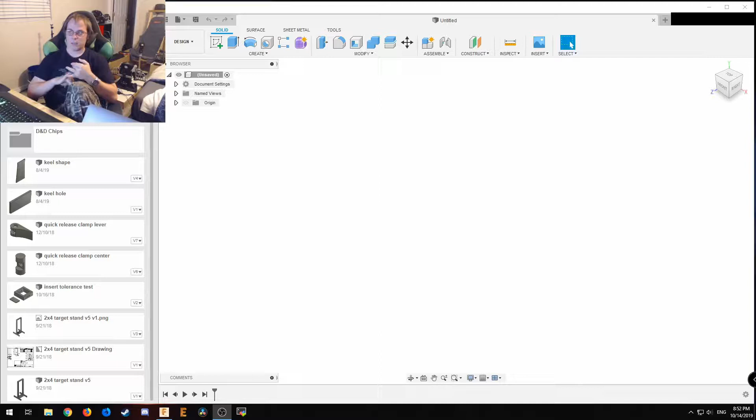It's design, some electronic work, a little bit of coding, and that's pretty much it. So we're going to break this down into a couple of chunks. First off is going to be design. This one's going to be a relatively physical portion. You're essentially trying to design the physical box itself. Now you can use something like an old drawer, you can literally make it out of anything that you want.

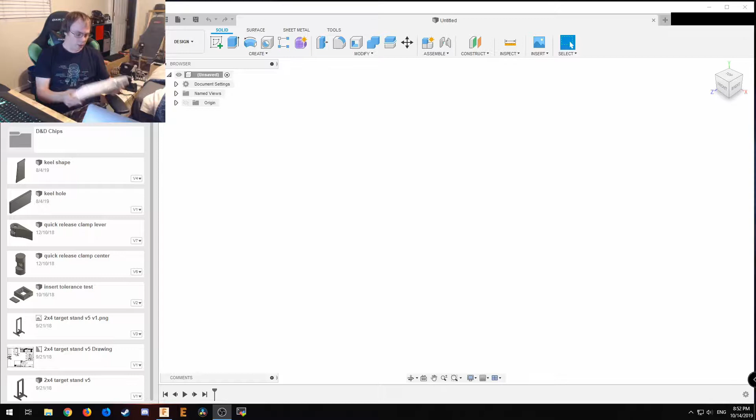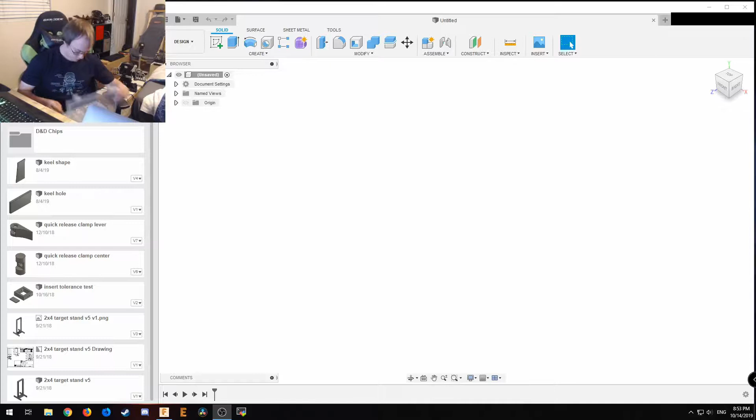And the thing that you need to know is the diameter of the neck. I'm also going to be using some potentiometers as well. So what I mean by the diameter of the neck is that you need to measure the part that's going to go through before you can screw it in. Not entirely sure you can see that, so I'll throw up a drawing. But essentially, we need to know what those are.

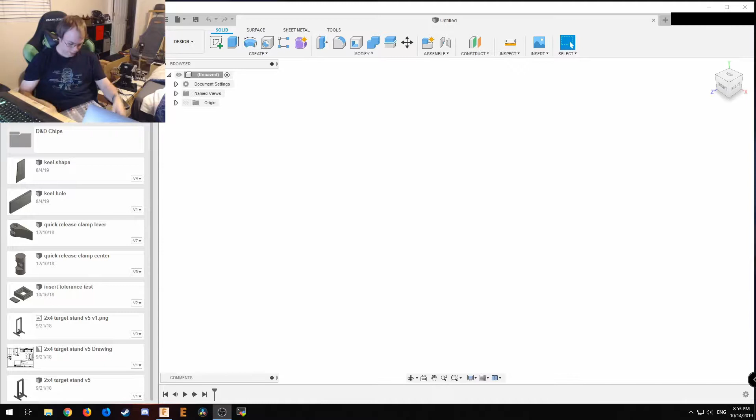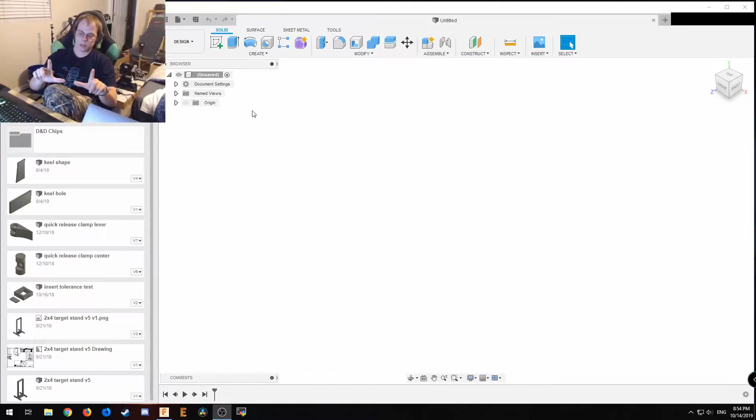We're going to make a row of essentially 5 2-position switches, a single 3-position switch, and 4 potentiometers. So I'm going to make a 2x5 grid, and we're going to start with that. I'm going to want this roughly, say, an inch between each switch. So I'm going to need 5 inches plus the half on each side, so we're going to go full 6 inches wide. Plus we're going to go the exact same measurement, so 3 inches tall.

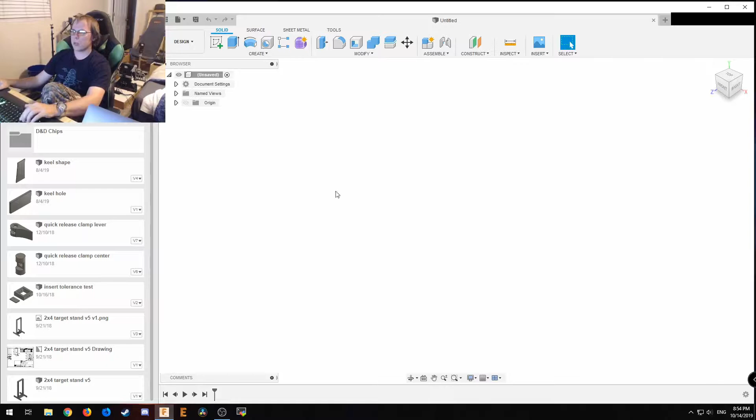So we're in Fusion 360. We're going to make a new sketch. I hit R, you can also use Create Rectangle. We're going to throw that chunk in there. We're going to make this a 3-inch tall by 6-inch wide. We're going to hit E and extrude that.

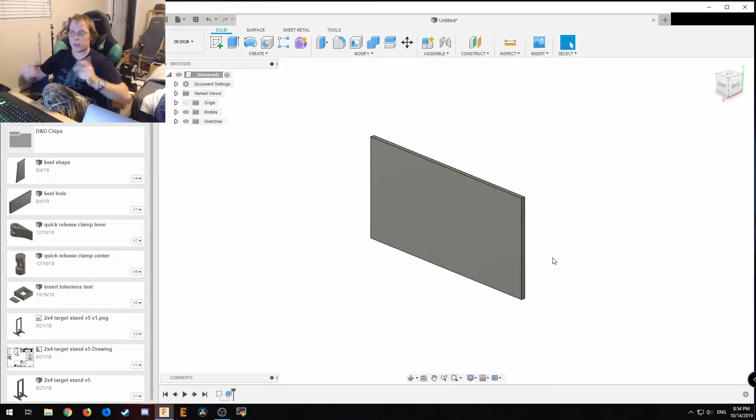I believe it's an 1/8 inch piece of plexi that we're going to use. You can also use wood, anything else that will fit your nut and bolt so that they actually go through it and you still have enough threads to actually tighten on it. So we're going to use this to actually make this thing stand up.

It's actually going to be super simple for me. I've got a couple of little bolts there that I'm going to use. Realistically, you guys are going to want to make this a standalone box, which means you can glue on the edges.

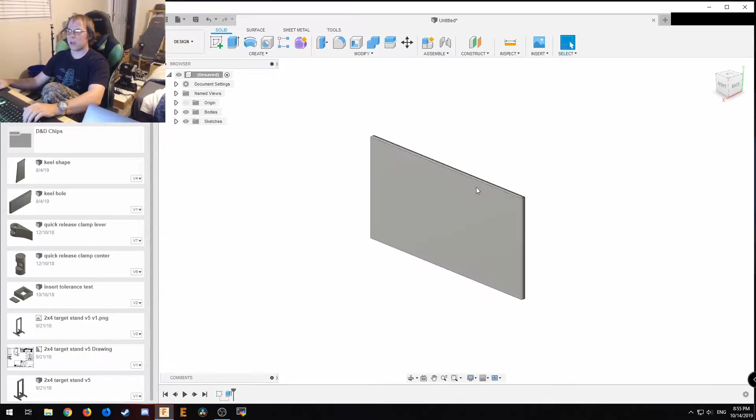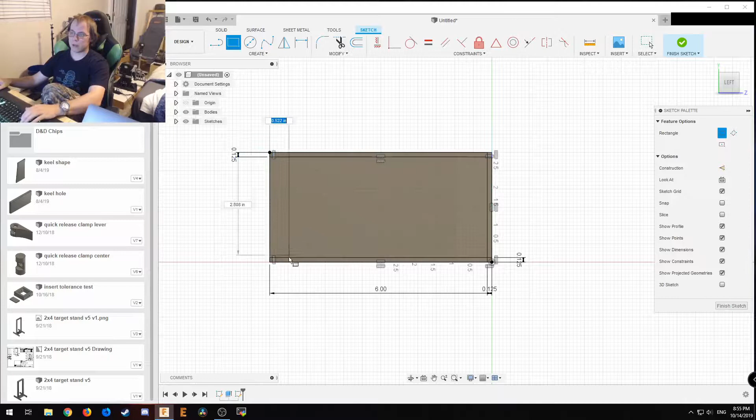We're going to go with that design for now. And on the back side, we're going to make another square. We're going to do a 1/8 inch tall by the full 6 inches. Going to make another one, 1/8 inch. I'm using R for rectangle to make these. And then we're going to hit E to extrude.

Click on all the little pieces that we want to be bigger, and we're going to extrude this back. Oh, we want enough space to mount the hardware. We want all the buttons. We do want a little bit of space. Let's go, we'll make it roughly square.

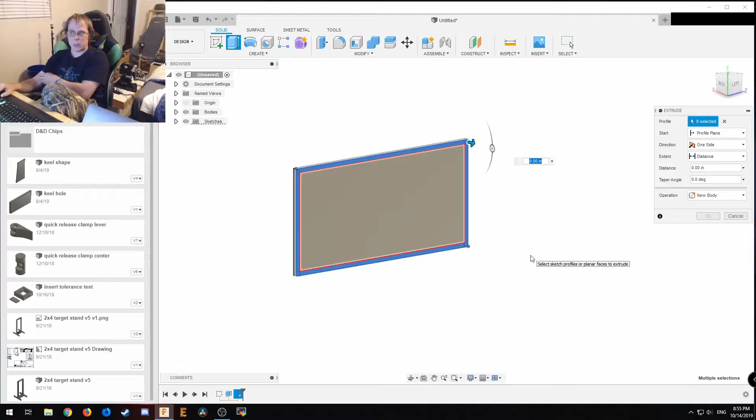So we'll do 3 inches, and then we'll have a little plate on the back as well. But now that I think about it, let's make those individual and separate pieces. So we're going to go in the button box. We're going to save this, finish sketch, save this, and we're going to call it front panel.

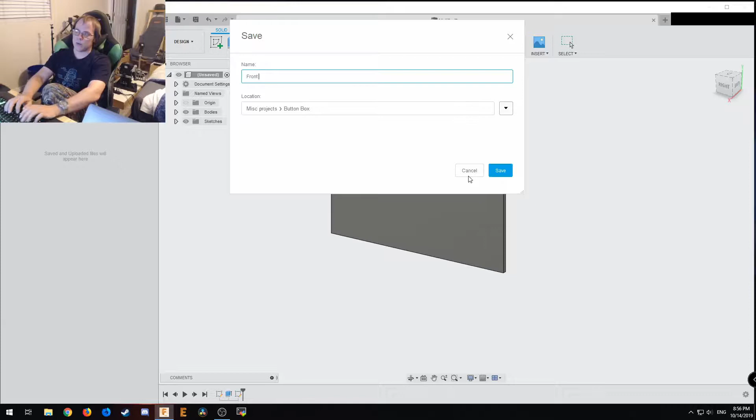If I can spell. Now we're going to make another piece, do the exact same thing. But instead of what we did previously, we're going to do an 1/8 of an inch by 6. We're going to extrude that 3 inches and call that top and bottom.

Now we're actually going to make a new assembly. We're going to save this and say button box assembly.

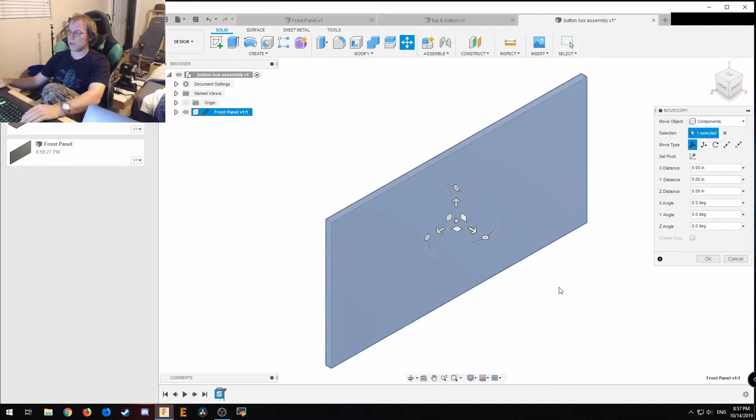Now we are going to click and drag the front panel in, and it's okay that these aren't done yet - we're going to do some more edits later. We're going to click on OK. That's going to come in there like that.

We're going to take our top and bottom, drag that in as well. And we're going to move this back a little bit, down a little bit so that they don't contact. Then we're going to come in nice and close. We're going to hit the J key - it's going to join those two. We're going to hit enter and accept that merge.

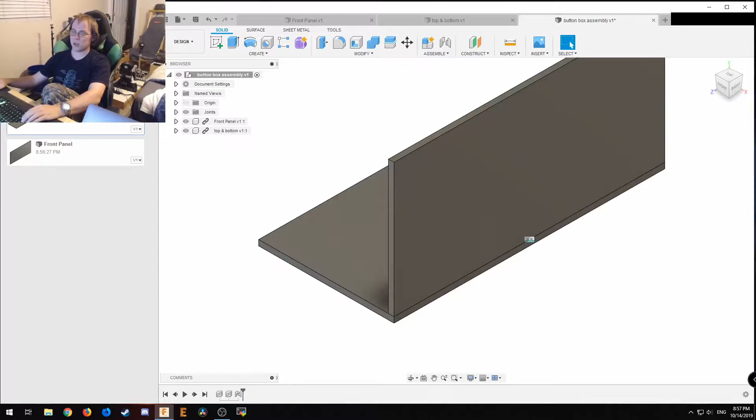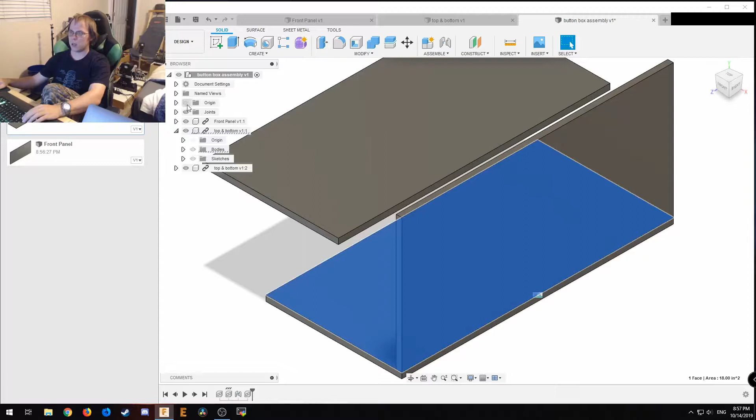Now we're going to pull in another one. Now we want a square box. So we want to change that joint - I'm going to go in here. We're going to click on joints, click on that one, and delete that actually. We want to make you contact this, and I'm holding shift and middle mouse button to do the rotations. We're going to join you like that instead, and then make you an eighth smaller.

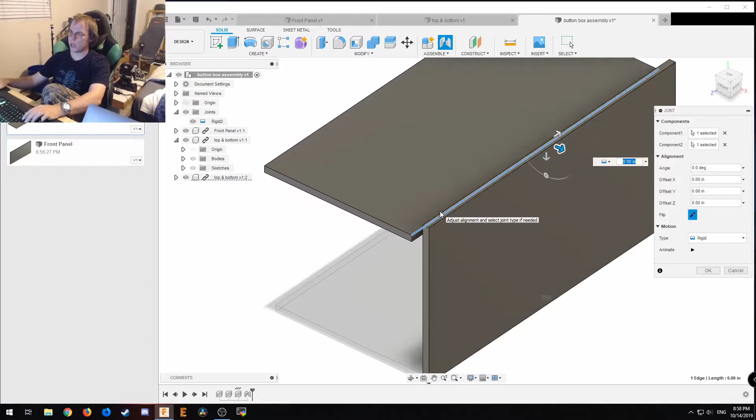And we're going to go here, here, J. Pin that in place, because we want a perfect 6x3 box. Now, on this little guy, we want the back side. We're going to do an extrusion of a -1/8 inch. Save that, come back over to the assembly, update with the latest.

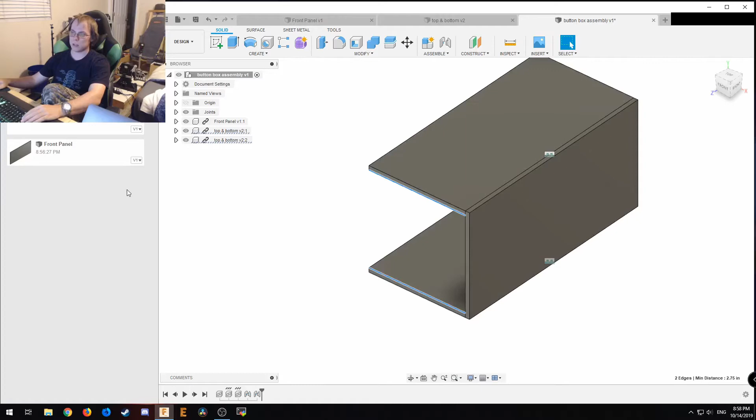And this is now from the very back to the very front, 3 inches exactly. And then from the edge to the edge, we still have 6 inches. We want to preserve that, so we would need a side that is exactly 2 3/4 by 1/8 less than 3 inches. So we're going to make the side, and we're going to make a rectangle.

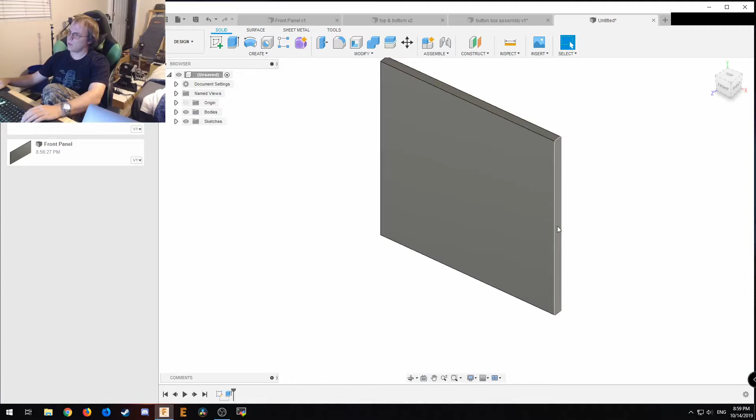This is going to be 1/8 of an inch thick by 2.75. We're going to extrude this up 2.75. Where did my measurement go wrong? This needs to be 3 minus, which means this is going to be 3 minus 2.75 minus 1/8. That should be the right measurement.

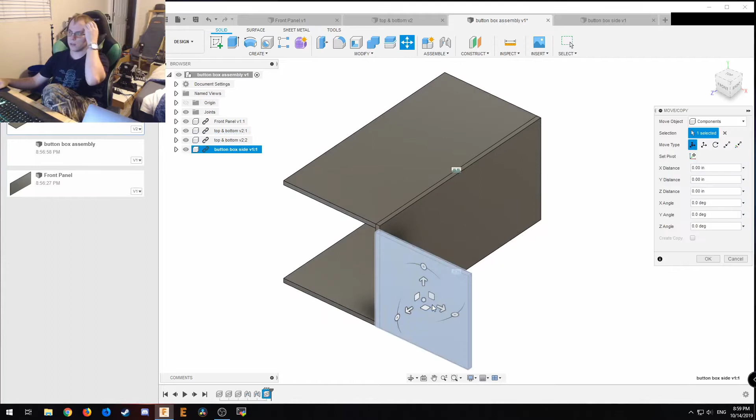We're going to click and drag that in. Move that back a little bit, put it in there. We just need it somewhere so that we can start doing some joining. Join that. That puts it right about where we want it.

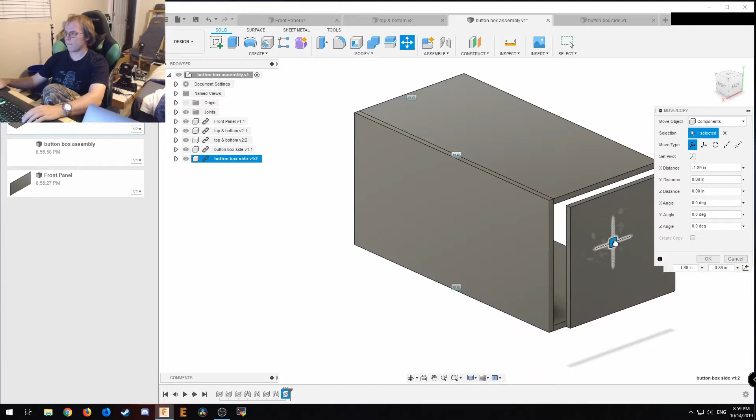Grab another one on the side. Don't forget, kids, save early, save often. And let's join you with you. So now we have an actual box made out of probably acrylic that we're going to spray paint this lovely gray color. Save that, and we're going to go back into the front panel, and we're going to lay out our buttons.

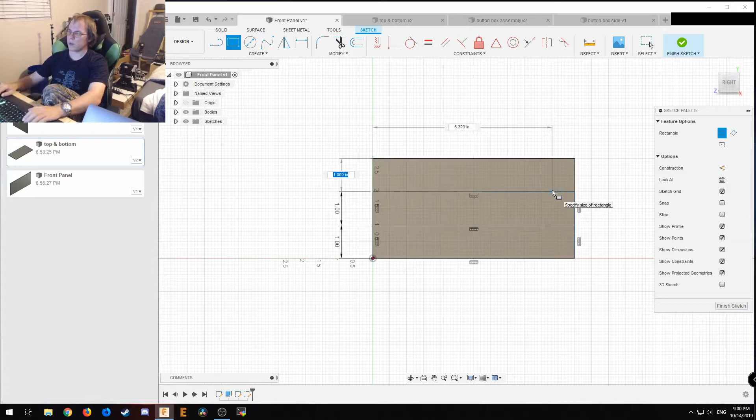So we want the full size. We're going to go 1 inch up, and another 1 inch up. That's going to be our 2 rows. Then we need to do 1 inch by 3 inches. And essentially, we're just going to make a grid. But we need 1 inch increments, not 2.

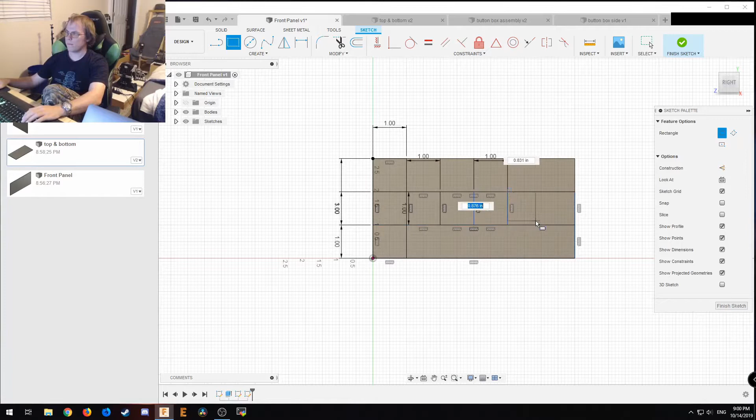That one turned out perfectly at 1. Weird. Now this makes it nice and simple and easy to lay out everything. So this is where it actually counts on your sizing.

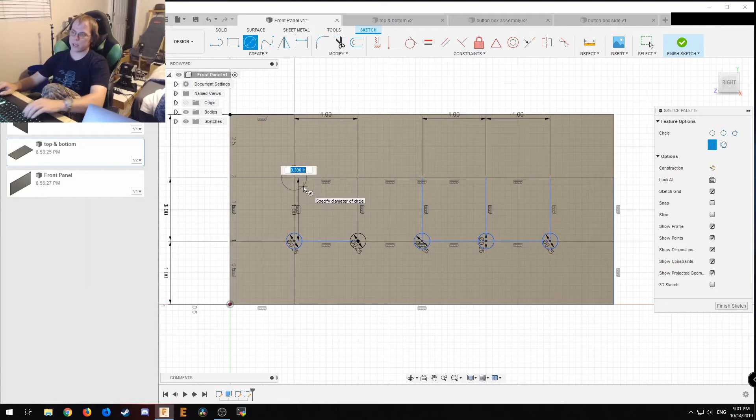So we're going to put in our circles. We're going to do a full row on mine of 0.25, so we're going to make circles 1/4 inch. These are going to be our switches. And then we're going to do one double action, which is a 0.3, I believe. And then we're going to make potentiometers.

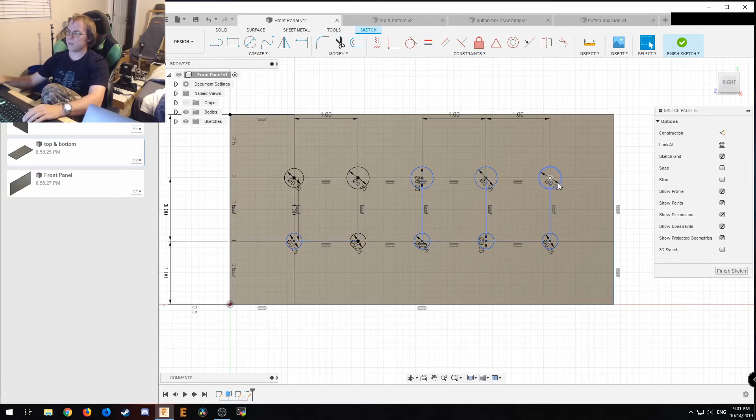Nope, too big. Definitely make sure to double check your and my math, because I haven't measured these in a little while, so I could be completely off on all my sizes.

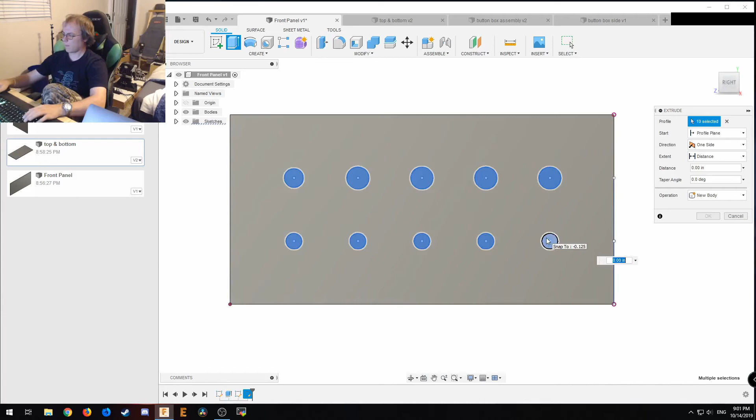And then we're going to go in, delete all of our external lines. We don't want any of these boxes anymore, they screw up a lot of things. We only want our circles. We're going to hit E, select all of our circles. We're going to do a -1 cut - that makes all of our circles. Save this, hop over to our assembly, update with the latest changes, save it, and there's our button box.

So it's very easy to make the grid. Definitely make sure to check all of your holes and circles.

I'm going to glue all of this together with a PVC cement. Another option is, because I have some holes in the front of my desk, I could just extend the acrylic down, drill some holes, and put some bolts through it, which I very well might do. Probably not, but I think we're going to make a full button box. And this is going to be a nice proof of concept with an Arduino.